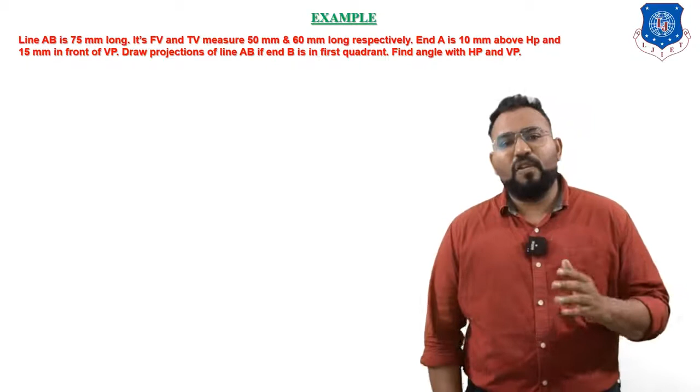So here the example is given. So first we will write the given data. First, we have the position of point A, which is 10 mm above HP and 15 mm in front of VP. So now you will decide the point A is in which quadrant? Yes, you are right. The point A is in first quadrant.

Now the second data that we have with us is the value of front view. If you read the first line carefully, line AB is 75 mm long and its front view and top view measure 50 mm and 60 mm long respectively. So we have the value of front view, which is 50 mm.

The third data with us is true length, which is 75 mm. Read the first line: line AB is 75 mm long. That means he is talking about the true length. So we have the value of true length, which is 75 mm.

Now the next data is the value of top view. Again read the first line very carefully. Line AB is 75 mm long and its front view and top view measure 50 mm and 60 mm long respectively. That means we have the value of top view, which is 60 mm.

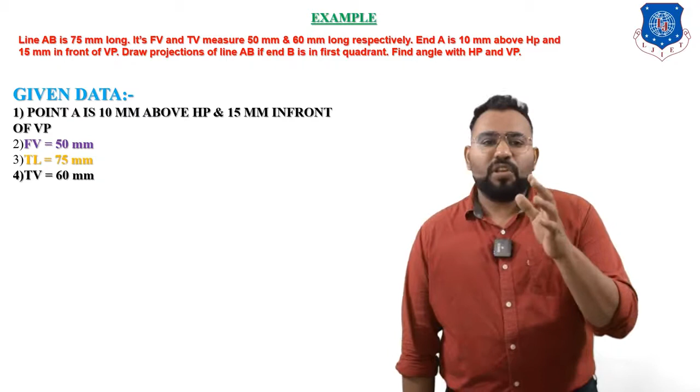Now you have to think about which quadrant the line is in. If you read the last sentence of the example, draw the projection of line AB if end B is in first quadrant. From the given data point A is in first quadrant, and point B is also in first quadrant. That means the line itself is in first quadrant. So this is how you have to decide. Now we have this much data with us, so let us start solving the problem.

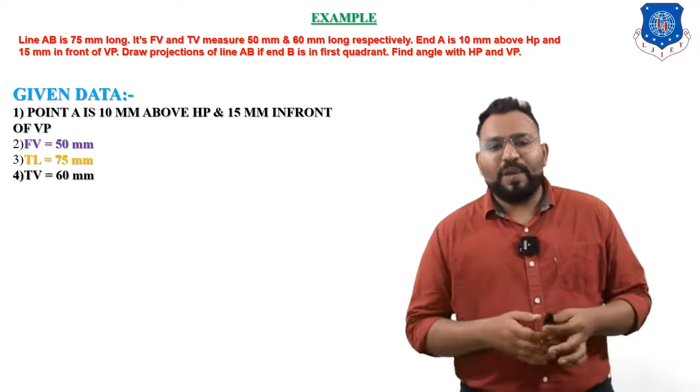Take your sketchbook and just repeat all the steps which I am going to mention over here. Yes, you are right, first we will draw the XY line. So first we will start by drawing an XY line of any random length.

Now he has given the position of point A. We know that point A is 10 mm above HP and 15 mm in front of VP. That means point A is in first quadrant. In first quadrant, front view is above the XY line and top view is below the XY line. So you will mark the position of point A.

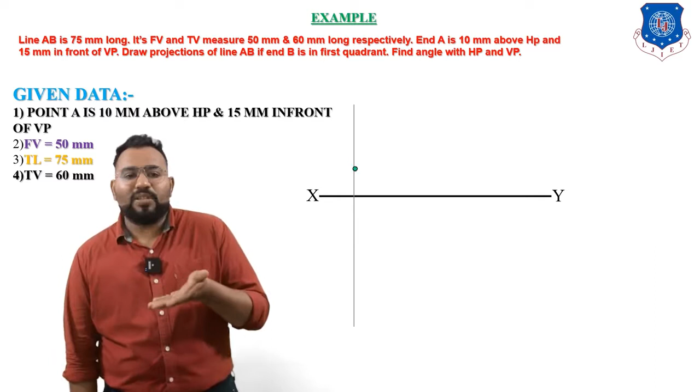So A dash will be 10 mm above XY line and point A is going to be 15 mm below XY line. First we will mark the position of point A dash, which is 10 mm above XY line. So this is the point A dash. Draw an extension line. Using the aligned method, give the dimension. Yes, right, like this.

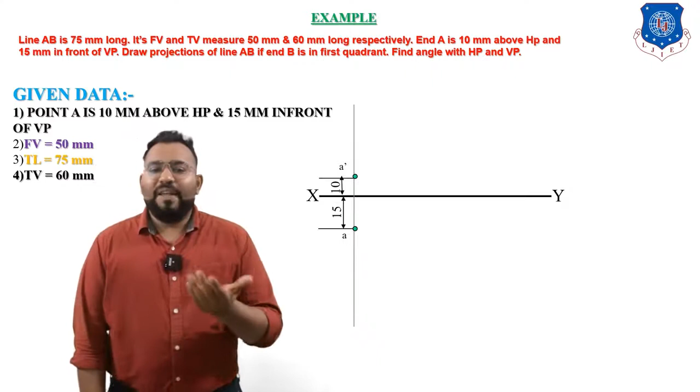Now we have to mark the position of point A. So 15 mm in front of VP. In front of VP, that means he's talking about the top view. So top view is 15 mm below XY line. So what we will do, from 15 mm below XY line, we mark the position of point A. From there we will draw extension line and give it a dimension using align method. So now we will have the position of point A dash and point A with us.

So now what I will do, from point A dash I will draw one horizontal line which is locus of A dash. Now here I have to mark a length of top view. So read the given data. You can see that the value of top view is how much? 60 mm. So on the locus of A dash I have to mark the 60 mm.

I will take a distance equal to 60 mm and A dash as a center, put an arc on the locus of A dash. Wherever it intersects, it will be your point 1 dash. So A dash 1 dash will be the length of top view. Okay, so now we have found the length of top view. Now from point 1 dash I will draw one vertical line of any random length.

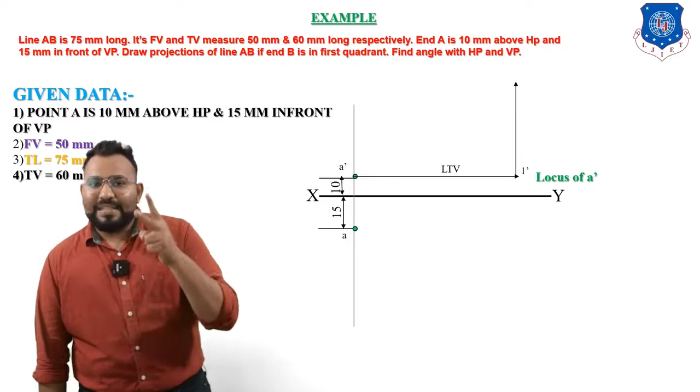Now on this vertical line I will find the point B1 dash. How? You can see that the value of true length is 75 mm, which is given over here. So I will take a distance equal to 75 mm and A dash as a center, put an arc on this vertical line. Wherever it intersects, it will be point B1 dash. So now connect A dash, B1 dash. This is your true length, and you can measure the angle theta over here. So now we have found the value of true length in front view.

Same way you have to repeat the same process in the top view. But before we do, from point B1 dash, we will draw a horizontal line. We call it locus of B dash or B1 dash. Now from point A, we will draw one horizontal line and we call it locus of A. Yes, you are right, locus of A. Now here you have to mark a length of front view. As we have done in the front view, now we have to just repeat the process in the top view, but in reverse way.

So from point A, we will draw one horizontal line and call it locus of A. Now here you have to mark a length of front view. In the given data, you have the value of front view, which is 50 mm. So take a distance equal to 50 mm in the divider, and with A as the center, put an arc on the locus of A. Wherever it intersects, it will be your point 1. So A1 will be length of front view.

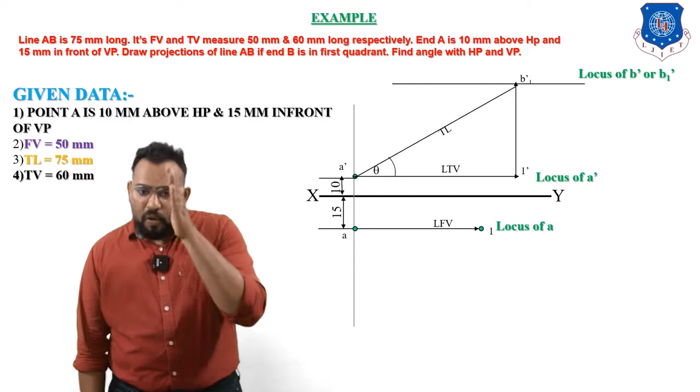Now from point 1 I will draw one vertical line in downward direction like this, of any random length. Now I have the value of true length, which is 75 mm, with me. You know that the value of true length is always the same in front view and top view.

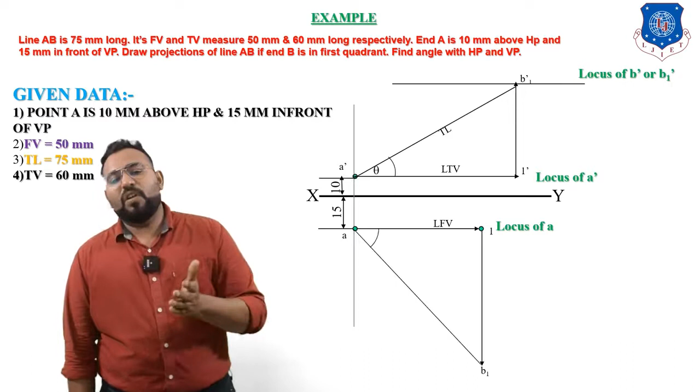You know that A' B1' is equal to AB1. So now what I will do, I will take a distance equal to 75 mm and, with A as a center, put an arc on this vertical line which is in downward direction from point 1, and wherever it intersects, it will be point B1. So now connect point A and B1. So this is your true length, and measure angle phi. So this is how you can find the true length in top view.

Now we will find the front view. To find the front view, see the screen very carefully. Now I will take a distance equal to A' 1'. Before I do that, let us give the name. From B1 we will draw a horizontal line and we call it locus of B or B1.

Now, from point 1 I will draw one vertical line which is going to intersect the locus of A'. So see on your screen, from point 1 I will draw one vertical line which is going to intersect the locus of A'. Wherever it intersects, it will be your point B2'.

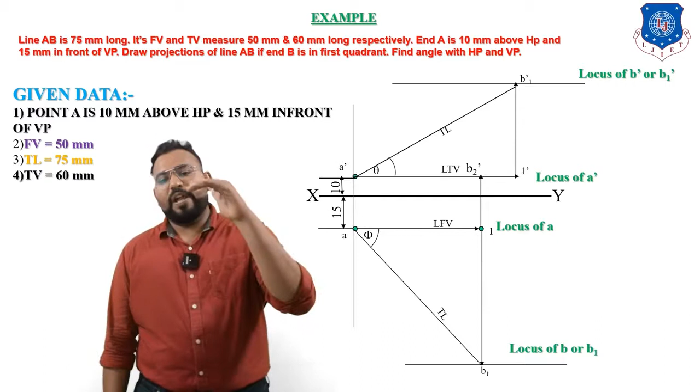So now you have to take a distance equal to A' B2'. Take a distance equal to A' B2' and, with A' as a center, put an arc on the locus of B' or B1' like this, and wherever it intersects, it will be your point B'. So now connect point A' and B', it will be your front view. So this is how you can find a front view.

So now the only point left with us is point B. We know that point B' and B are both on the same vertical line. So from point B' we will draw one vertical line in downward direction, as you can see on your screen, and wherever this vertical downward line intersects the locus of B or B1, it will be your point B. Now connect point A and point B, which is going to be your top view. So this is how you can find front view and top view.

So this is a very important example. In this kind of example you have the value of front view and top view with you, and by using this data you have to find angle theta and phi. This is why this is a very important example, because you have the value of front view and top view, but you do not have angle theta, angle phi, angle alpha, or angle beta. So you have to find all these angles, by using the approach of length of front view and length of top view.